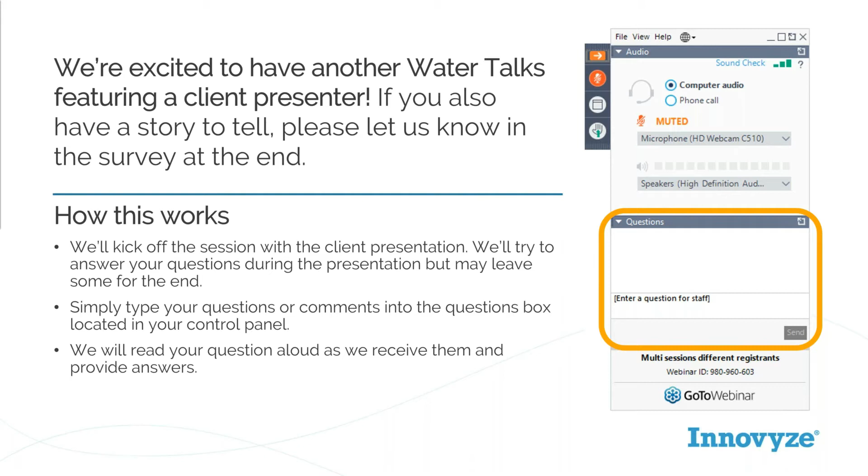I'm now going to hand it over to Troy, who's going to tell you a little bit about his company, Infra-Struct, and also his experience with ICM doing surface water analysis in mining and also sizing complex hydraulic structures. So Troy, I'll hand over the controls to you.

Thank you. And thanks for the opportunity from yourself and Innovyze for us to be able to share our experience using the ICM software and the work that we've done on the particular projects that we're going to talk about this morning. A little bit of an intro on Infra-Struct and who we are and what we do. We offer infrastructure management, engineering and construction services, as explained there in my bio, to both the mining and the municipal sectors. Our primary point of difference that we strive to provide our clients is a one-stop shop turnkey solution where we can take a project from a single CapEx budget line item right the way through to a functioning piece of infrastructure under a single engagement.

Our passion to provide that service is based on many years of experience observing other large organisations delivering such projects under relatively cumbersome models which comprise multiple consultants and multiple contractors throughout the project delivery life, which tends to not always produce the best possible outcomes and can be an expensive and time-consuming process, as well as an in-house management nightmare to administer all of the various procurement arrangements with the suppliers.

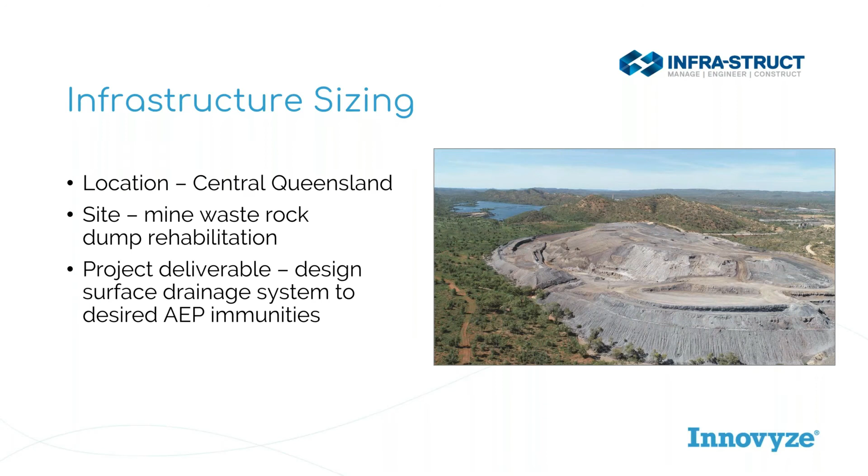Just a couple of project stats before I jump into the detail, just to put the project into context. The overall footprint of the site we're working on is 2.3 kilometres long by 1.7 kilometres wide. The height of the dump that you can see in that visualisation image is approximately 100 metres high. All up, the project duration will span 2.5 years with 6 months remaining. A total of 3.5 million cubic metres of dirt will have been reshaped and moved, including the potential acid forming material being reshaped and the non-acid forming material being locally won and imported across the landform. It's a total of 750,000 square metres of reshaping and trimming to profile, which is 75 hectares.

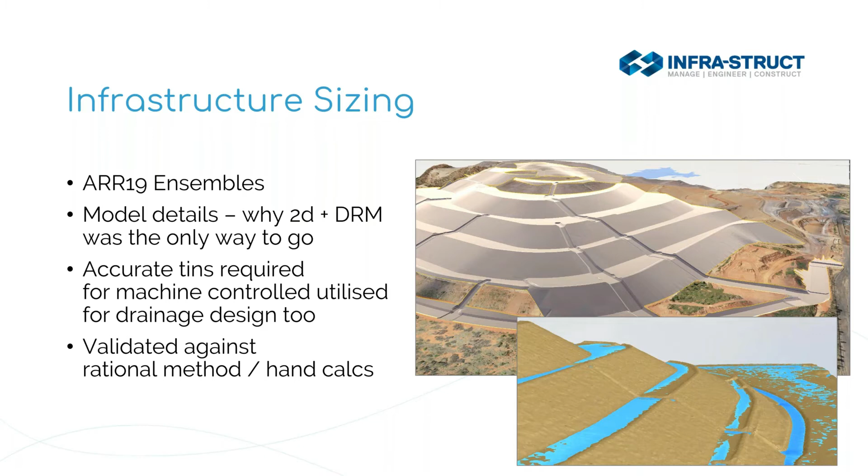That allowed us to run the model and in a relatively quick time frame pull out results at every one of those locations, import them into a purpose-built calculator, which we constructed in Excel, and we were able to automate the design process of the benches and the chutes within that tool. And that allowed us to measure what freeboards we had at each of those result line locations. If it was insufficient, we could then redesign the surface accordingly.

And if we had surplus freeboard, that may in fact allow us to reduce the size of drains or reduce the extent of berms or benches that needed to be provided to convey those flows at that particular location. So given the quantities and the cost, that was a massive advantage to the project. But what that needed is some clever sequencing of the works so that we could do that in an efficient way and get those great results.

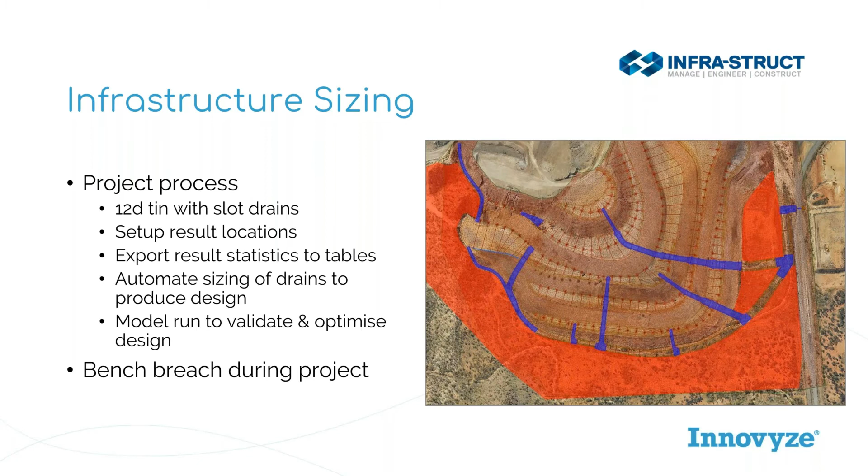I guess another big advantage on this particular project and for our company is we're also running a Trimble Stratus drone, which we fly monthly LiDAR surveys of the entire site. Using the ICM software in conjunction with that functionality and that data that we're producing, that enables us to run a live surface model of the project and predict any potential scour locations or water management issues that we may

The extension to that is that we are able to and will be providing a full as-built ICM model of the final product to validate that the design objectives have in fact been met on the ground, which has been very pleasing to our client, given that they will ultimately be maintaining this infrastructure until the mine is closed, which is not scheduled for several years from now.

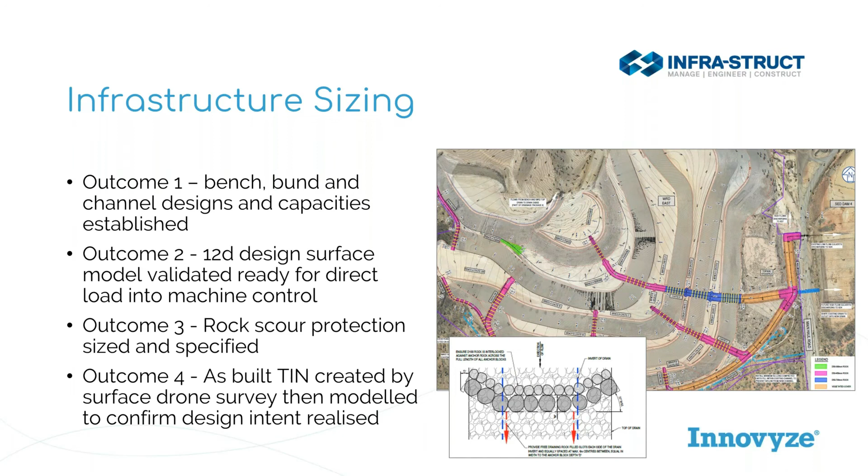One other project that I'd like to just briefly touch on is an open cut coal mine, again in central Queensland, that we've been involved with, where we've helped the client understand the immunity that they currently have to some underground portals. So this particular site initially was viable under an open cut approach. Once that resource had essentially been exhausted with the open cut methods, there was a large resource remaining, which was accessed via underground portals, which can be seen in this image through the open cut high wall.

The challenge there was that a large river passes adjacent this site, and in previous years and relatively large events, there has been overtopping of that river into the pits, ultimately putting the asset and the mine at risk with inundation and damage.

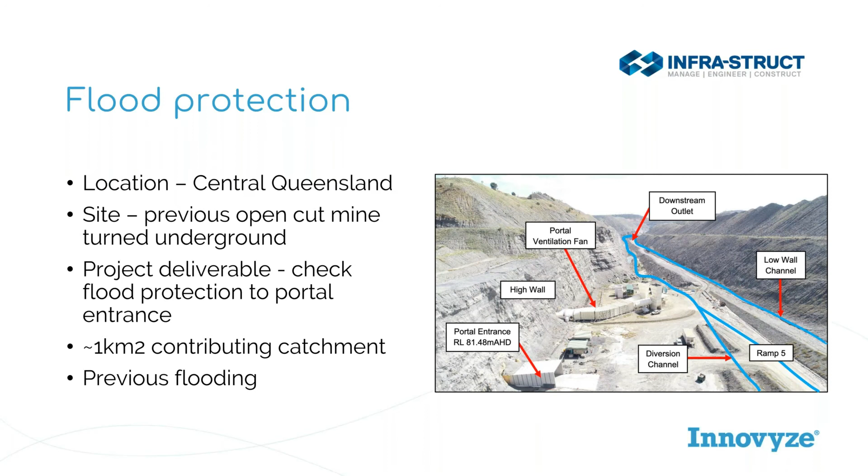As you can see by the image, the open cut overburden crests and the high wall tops and toes, and so on, were fairly easily definable. The catchment, as noted there, was in the order of a square kilometre, and we had the benefit of previous studies and calibration points to validate the model.

One of the key considerations is always reflecting the surface to be modelled within the direct rainfall model itself, and making sure that we've got a good representation there. We find with the point cloud data that we're able to produce out of our drone surveys and the LiDAR information that's typically available at these sites, we can get a very good representation, which is sufficient for the levels of accuracy that we're working to.

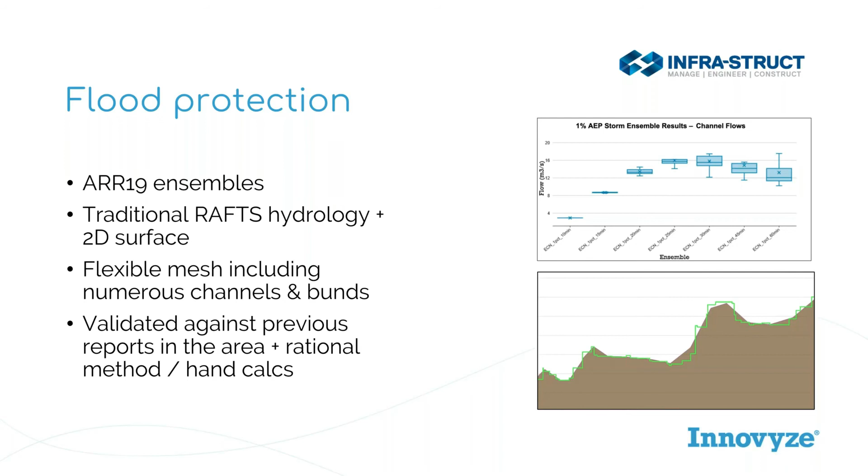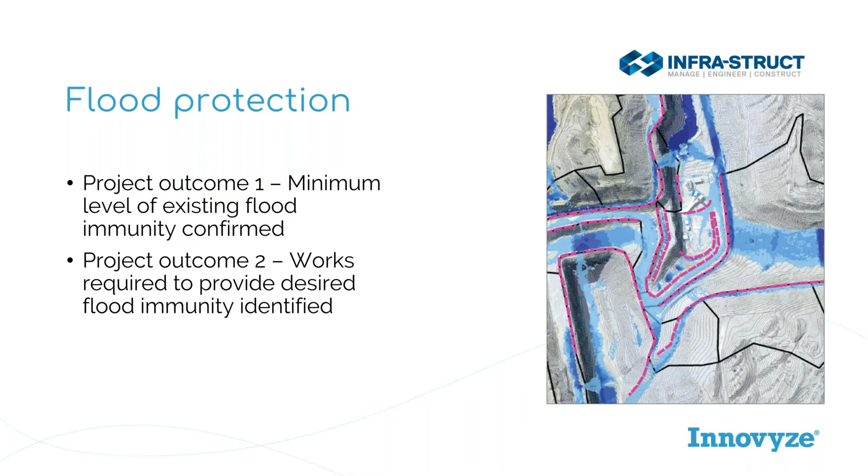Ultimately, in terms of deliverables, we were able to provide inundation maps to the client where they could see areas that were potentially at risk. We were able to quantify what freeboards were currently available, and we were able to define what works could be provided on the ground in order to provide the minimum standard of immunity that the client was after for those particular portals.

And that about wraps up the technical run through of the two projects that we've used the ICM software for. I'll hand back over to you, Sophia, for the next presentation. Thanks, Troy.

You made a joke this morning that you could talk for hours on this topic, and I don't disagree. I reckon you could talk for days. You know it so well. I was trying my best to squeeze that all in, so hopefully I didn't run too far over. No, you're good. Big project, and not a lot of time to cover it all.

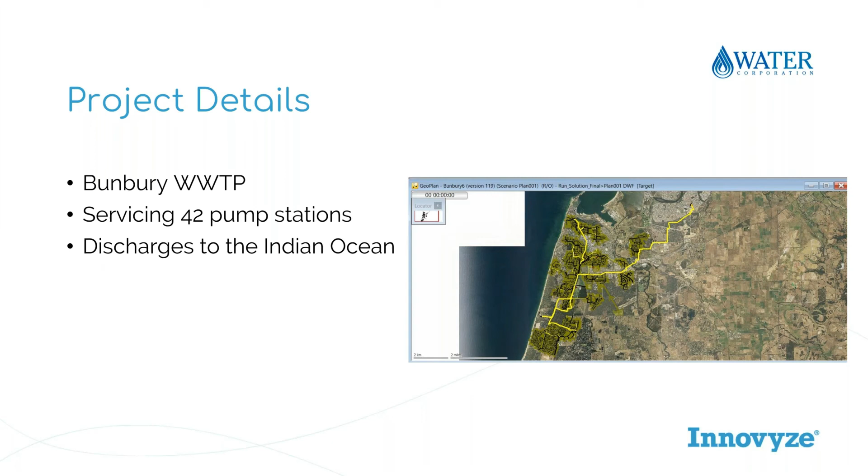And moving into the next slide. So it's very slow for some reason. So the issue is with the capacity of the wastewater treatment plant. So Sophia, I can't change slide. Rosario, I am going to be your admin person, and I am going to move slides for you when you ask me to. I'll ask you. Yeah. Okay. Yeah, that's better.

So I was saying that the treatment plant has got a nominal capacity of 700 cubic meters per hour, which, if exceeded, will shorten the process times within the treatment plant, which then causes poor performance at the treatment plant and a poor discharge into the Indian Ocean, which can also put us in trouble in terms of operating license. That doesn't happen regularly. So on a weekly basis, we are, on average, within the limit, but on a few days over the week, we exceed these limits.

We need to say that Bunbury runs a separate system. So although there are some inflow and infiltration components, they are not really relevant to the problem. So obviously, the upgrade of the treatment plant requires a substantial capital investment, and the idea was to try and see if we could actually flatten these curves and defer the capital upgrade.

And at the same time, if we could store water within the system to then discharge it into the treatment plant for a flatter inflow hydrograph, we would then greatly improve our processes and the energy consumption within the site. So there's a number of advantages related to a flatter inflow hydrograph. If you can move to the next slide, please.

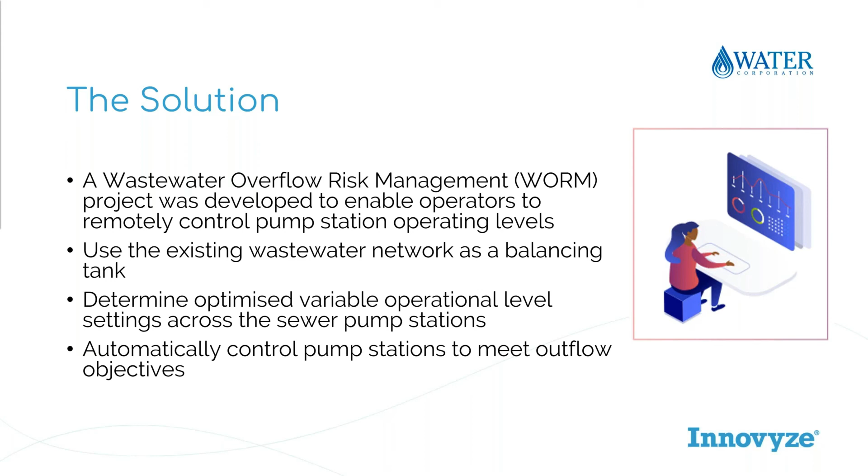So if you can move to the next slide again. So the process was obviously model-based. So we started with an ICM model, and the first thing that we did was to calculate time to overflows for the hydrographs using the model for all of these pump stations.

And then we would also look at where connections were to avoid excessive surcharge. That would determine basically through the model what's the maximum allowable level that we could attribute to each pump station. So that is obviously over the normal cut-in level, and therefore that would be the interval where we could determine options for each pump station at the various times to operate.

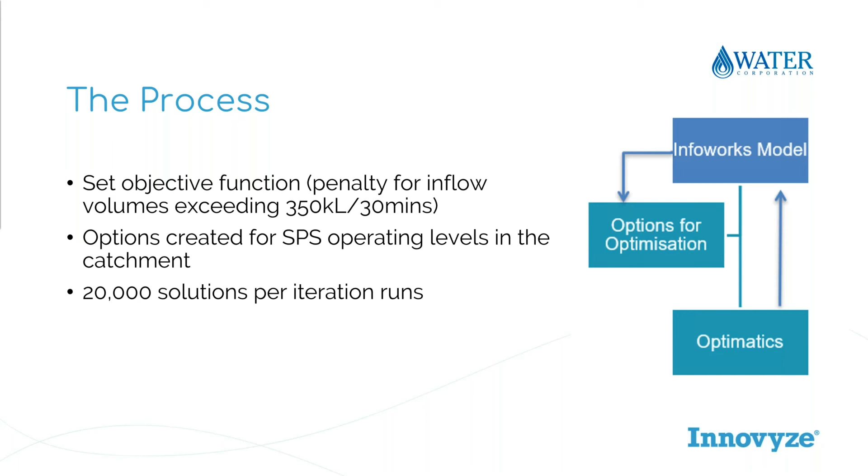At the end of this process, we picked a solution, and we delivered an operating manual, which essentially contained cut-in and cut-out level settings for each sewer pump station that we would use. We used 9 of those in the end, and that went straight to the control room. And then we provided the region with maps showing the maximum level of surcharge that they could expect as we run the system in this way. So, that wraps up the project.

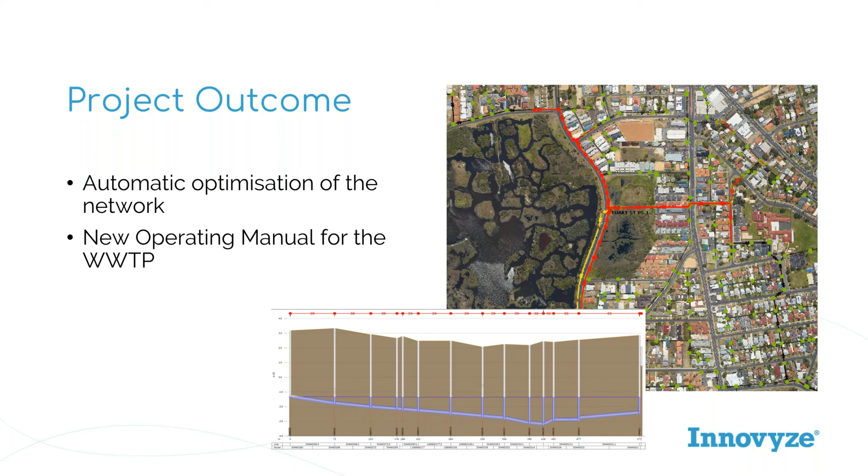Thanks, Rosario. We've got a few questions already, and I think this one came through. I'll just go back to the first slide. This one here, I've got a question here.

Is the peak system loading for wet weather or dry weather? Okay, so this is dry weather. Because it's a separate system, there's no big difference between wet and dry weather. We were not too worried about additional flows in wet weather because there's more dilution, and so the actual treatment process is less stressed. So we didn't have the same problem as in dry weather.

Okay, and another question: how much money do you think that you saved going through an operations method rather than doing capital investment? Fundamentally, from a capital perspective, it's a deferral of approximately $4 or $5 million for a few years. So we would spend this money, but we are just buying time. On the other end, there are some savings in operational cost, particularly the energy profile, I'm told, is better now at the treatment plant. So definitely a good way to go.

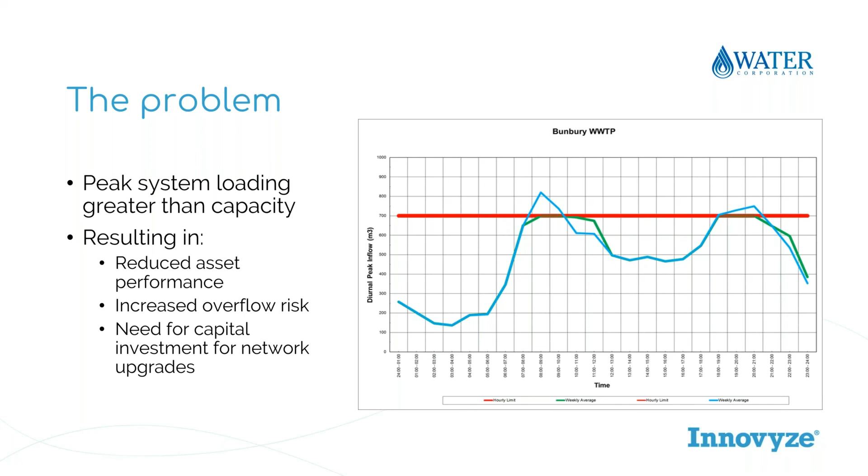Absolutely. And another question here: have the revised on-offs been implemented already in the real world, and have they been tested? So we've done some tests in smaller systems to verify that it all works. We are currently deploying the WORM functionality in some of these pump stations. So the full solution has not been implemented yet, but it's been partially implemented so far.

Sounds like you're well on your way. Is that something that you're going to do at other wastewater treatment plants, or do you not have the same problems? We haven't really looked at it anywhere else because there was no driver for it. But I guess it's important for us knowing that we've got this methodology now that we can adopt elsewhere. Yeah. I can imagine that people from other states and from other water utilities or other parts of the world would be really interested in that and seeing if they can implement it in their regions as well.

Well, I'll open up the questions to both Troy and Rosario, who will be on here for a couple more minutes. Troy, if you're there, I've got one more for you. I find my spot. So we've got a question here.

How confident are you that the rock chutes will stand up to the high flows in practice? Well, based on the modelling that we've done, we're very confident, and throughout the design process, using the ARR 2019 ensembles, we can understand the range the design of those chutes has been sized to handle. So, yeah, we're very confident that the design is suitable for the AEPs that we've been requested to cater for.